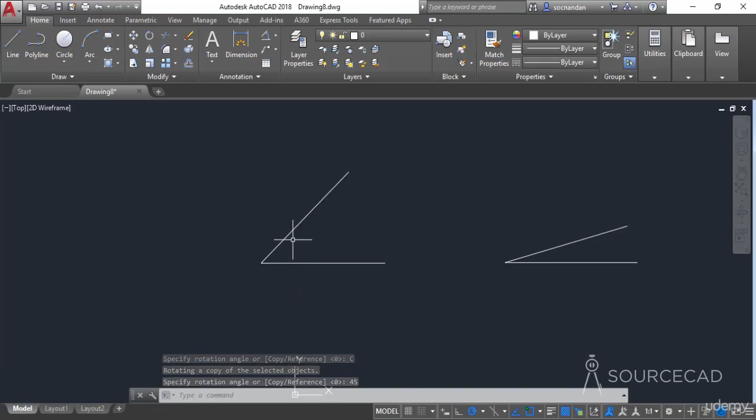Now let's look at one more case, where we'll change the base point. Let's select the rotate tool, select the object, press enter, and this time I'll select the midpoint as the base point. You'll notice that the object will be rotated from that point, and you can add the angle, let's say 60, and here we have it, the rotated line. Let's now erase it.

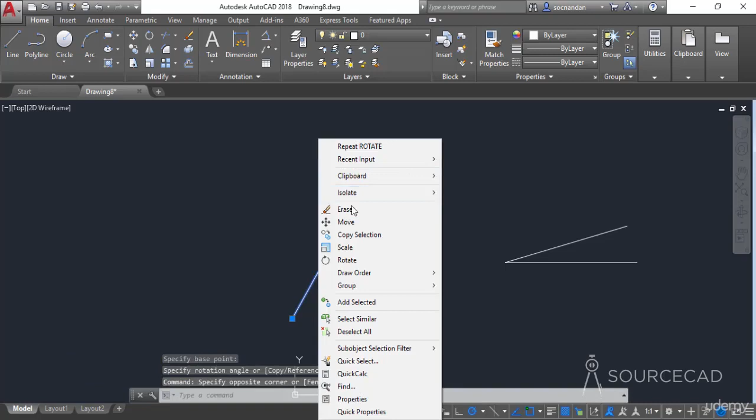Now let's look at this case. Here we have a line which is inclined to this horizontal line, and we don't know the angle to which this line is inclined. If you want to rotate this line to an angle of, let's say, 60 degrees with respect to this line, so that the final angle is 60 degrees plus whatever angle this is, then we can use the reference option.

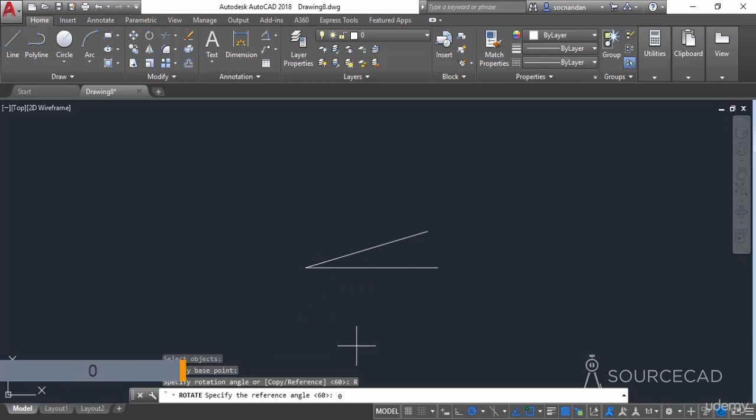For that, select the rotate tool, select the object, press enter, select the base point, select the reference tool, and specify the reference angle, which is 0 in this case. So let's type 0 and press enter. Now we need to enter the final angle, which is 60, and press enter. So the final angle for this line will be 60 degrees plus whatever the angle of the original line was. In the initial case, the line was inclined at an angle of 16 degrees, so the final angle will be 76.

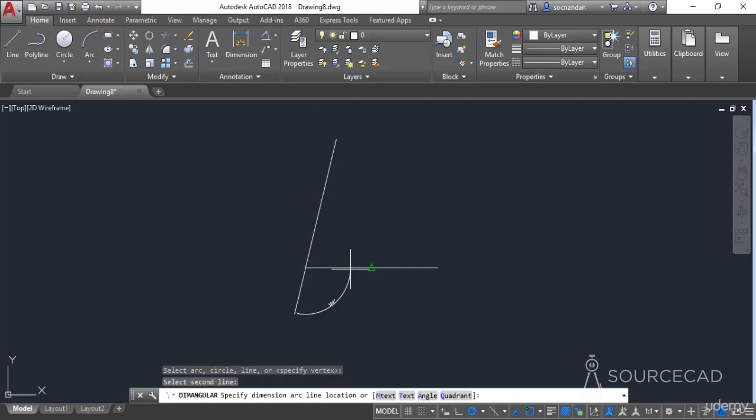Let's check it. I'll select the angle tool, click on these two lines, and yes, we have this inclined at an angle of 76 degrees. To verify that, let's press Ctrl+Z a couple of times and check the original angle. I'll click on these two lines, and yes, we have this line inclined at an angle of 16 degrees. So even without knowing the angle of these lines, you can change its direction, or rotate them to whatever angle you want from their own position.

You can use this reference option to rotate this line to any final angle also. For example, in this case, we again don't know the angle of this line. Let's assume that we don't know, and we want to rotate this line to a final angle of 30 degrees with respect to this horizontal line.

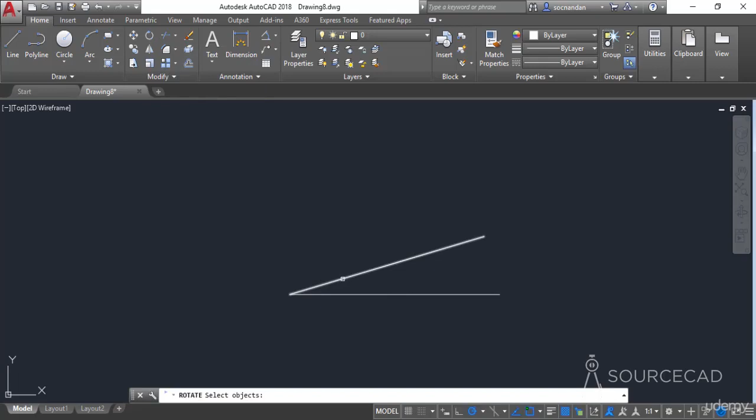For that, I'll select this rotate command, select the line, and press enter. Now specify the base point, and once again select the reference option, but in this case we will specify the reference angle by clicking at this point, and then clicking at this point.

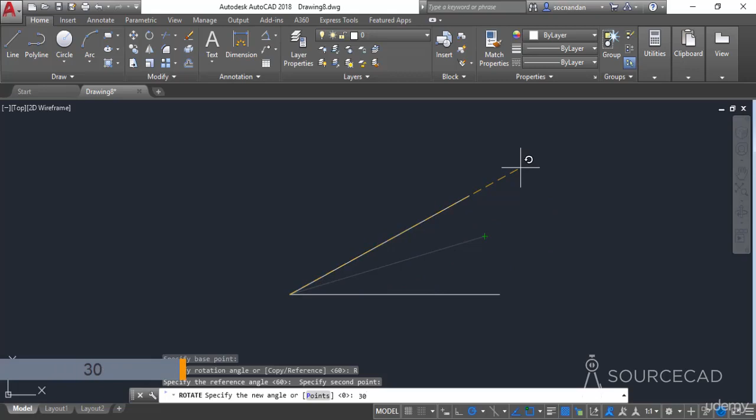Now you'll notice that the cursor will move along with this line, and now we need to enter the final angle up to which we want to rotate it. We want to rotate it to an angle of 30 degrees, so type 30 and press enter. Now the line has been rotated to an angle of 30 degrees with respect to this horizontal line, and it hardly matters what the initial angle was.

So we can also check this. Let's select the angle option, select this line, and yes, we have an angle of 30 degrees here. So in this way you can rotate a line to any final angle, even without knowing its initial angle with respect to the positive side of the x-axis.